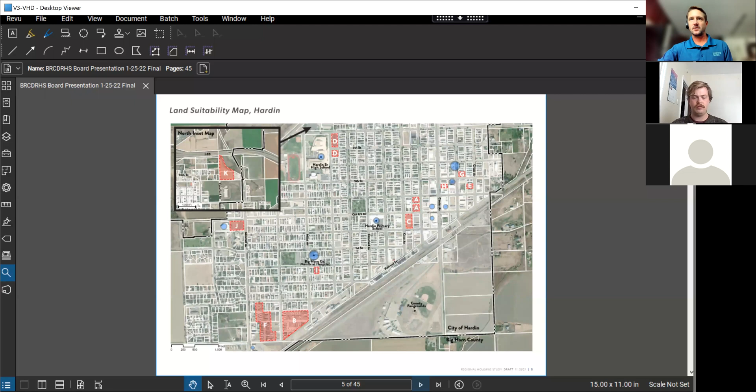So we've tried to explore all these options as we put these maps together. Typically we had between 8 and a dozen sites for each one of these.

So we looked at Crow Agency as well. There's a couple of projects that are kind of always in the works, but let's leverage the existing infrastructure where those projects are to maybe think about a different type of modular construction. There's already plenty of modulars out there. Let's use the local community development corporation. Let's look at some great case studies - the Good Earth Lodges are one that we'll point to here in a second.

And let's try to find a spectrum of sites so that the community can take these things, with the backing and due diligence done through somewhat of a scientific and land use study, showing that these are valid sites for further exploration. We'll show you how that might work in a second too.

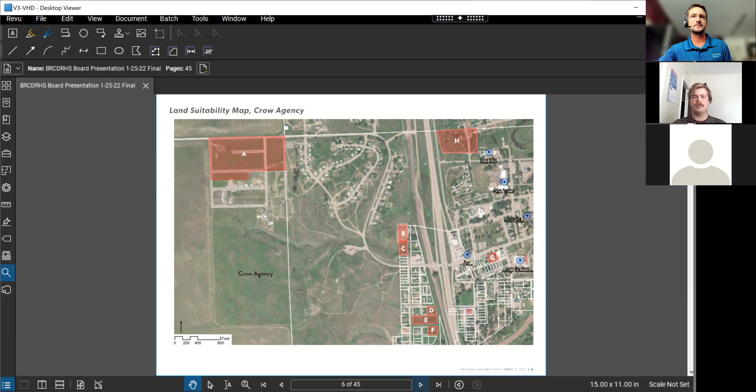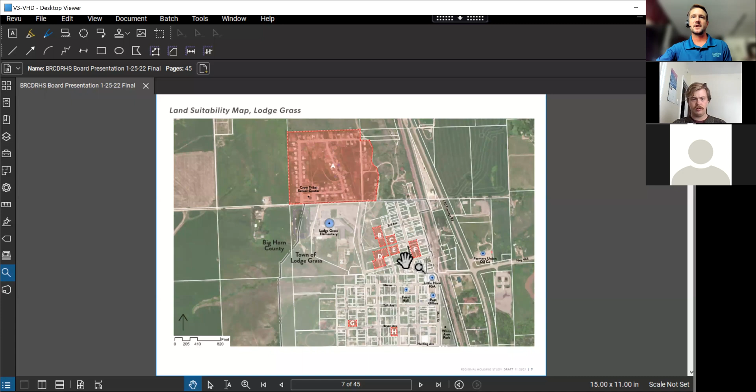We also looked at Lodge Grass and spoke with the mayor, other representatives, and the county commissioners there, and they've recognized a couple places where infrastructure might be extended. We want to make sure that if it is, there's not just one site - maybe there's a phasing to get this core area of former platted sites with new infrastructure to them. That could be a new cluster of homes that is walkable to some of the amenities in town there and close to the schools and everything else.

And it doesn't need to be new - it might need to be rehabilitation. Infrastructure is huge in this county and in the reservation - that's the biggest infrastructure need here. So when you're thinking about what's step one, let's make sure infrastructure is safe and healthy, and then the housing will be able to leverage some of those investments.

Rehabilitation I mentioned, and we'll show you some concepts about how there might be precedent for innovation using the Good Earth Lodges I mentioned - using compressed earth construction, traditional construction techniques. They leveraged available land and partnerships with institutions there. That particular project, which is linked in the study, shows how you can use local labor, local folks to provide jobs and to educate. Anytime you can do that, absolutely leverage it - it reduces costs and helps out everybody.

Carbon County, Carson, quickly go ahead, give us the upshot.

Yeah, Dave, I got a question. Could we zoom in a little bit? Yeah, you bet, let's see, I can adjust it for you as needed here. Maybe not that much. Okay, let me see if I can change this. That, I think that's good. Just a second here. I'll figure out a full screen here in a second.

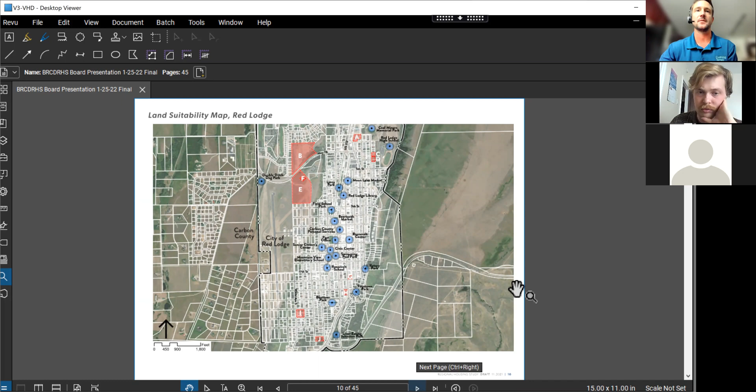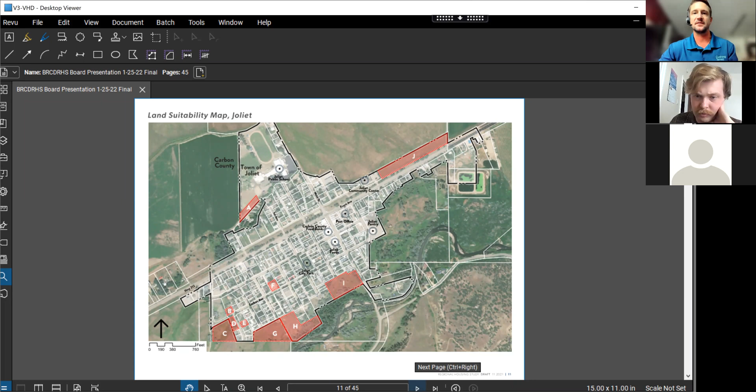Joliet, challenges are massive in Joliet, obviously, just because of a number of things - water, physical constraints, and then the highway going through town and crossing, and that's been kind of a safety issue there for a while. But if you start to look at the same parameters, there are a couple of sites that do appear to meet that opportunistic standard, but a lot of them are private in Joliet, so it's kind of a challenge too. There's a school district property up there that might be interesting, but a lot of private property, which has its own set of challenges. Infrastructure is always huge too in Joliet.

But quick Carbon County takeaways: let's look at those adaptive reuse options. Really great opportunities there to do something really cool that's meaningful for the community. The R4 zoning seems like a good district, so let's look at leveraging some of those zone districts to get one of those small to medium-sized multifamily projects. And that's not in the core area. The core area does encourage mixed use and historic scaled mixed use, but that R4 zoning seems like it might be the appropriate one, in Red Lodge at least.

Let's help employers build it themselves, as I mentioned, right-sized projects to fit character. And Carbon County, well, Red Lodge in particular has some challenges with conveying land for projects. They have to do it at market rate, but there are still ways we think you could do long-term leases or other kinds of models that would still help you with the fact that there's just not a lot of public or institutional land in that community.

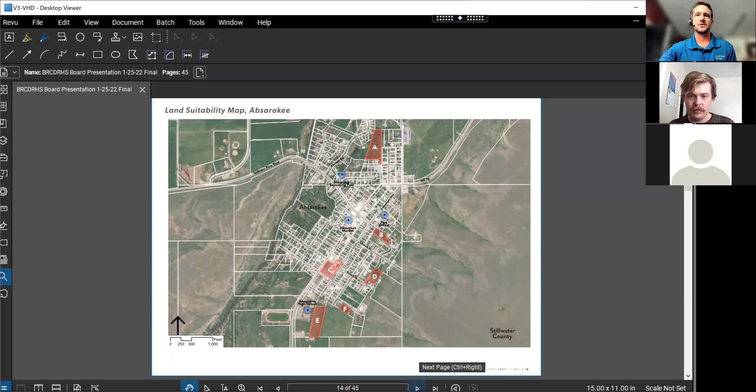There's some school district land out here, and we were interested in the old Sandstone School as a historic property, seeking opportunities to look at that in a way that could provide almost a new community center, which I know people are looking at as we speak. Wanted to make sure we had a good look at an interesting community like this that is unincorporated.

Lots of opportunity sites in Stillwater. Not a whole lot of diversity of housing types—there's just a couple multifamily units that we saw according to the tax assessor's rolls. These places really need a catalyst more than maybe some others, just because you need to really push the boundary on multifamily to have that kind of pioneer in the marketplace.

For some of the reasons Carson mentioned, a community land trust model, a permanent ownership model, might work there. You're surrounded by community land trusts, so that's an opportunity you might see. Then try to get that density up by getting smaller lots and smaller units in, so that people can still get that single family home ownership in Columbus, Stillwater. But if we can get the market side—the square footage—down, the cost down, then maybe there's a way to do that without as huge a subsidy gap or gap financing.

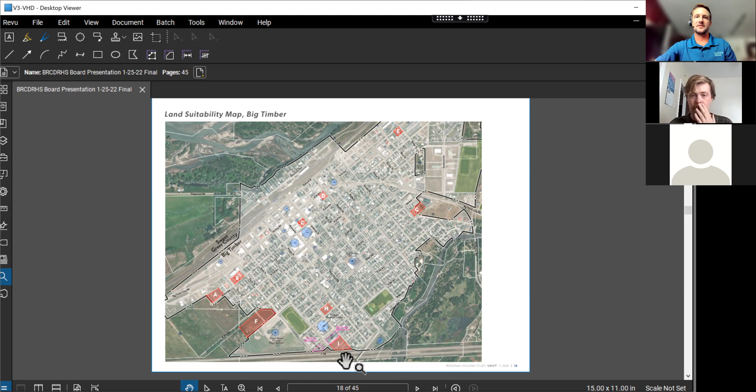Big Timber and Columbus have similar makeup. There's a bit of an outdated zoning code that might be preventing the ability to do that middle scale, smaller to middle scale multifamily project, so you might need to consider some zoning amendments, which we pointed out as opportunities. But there are some ideal sites along the old highway, and you can sort of have this critical mass already with apartments down here by the interstate too, with good visibility and good access, as mentioned, to both Bozeman and job centers and Billings.

This is just an example of another piece of information we include—snapshots of the sites. This is, I think, a good way to line up these sites with actual places, and there's some rehabilitation options perhaps, or just underutilized or vacant lands, parking lots.

Certainly in downtown Big Timber, taking parking lots away can be trouble for retailers. But again, to have that historic scale, perhaps mixed use multifamily building type—maybe not next year, but five years down the road, or maybe something in between.

Like I said, caught in the crosshairs. There's actually a lot of vacancy, interestingly, in Sweet Grass County for a number of reasons. It might even be more of that, I don't know, second home market growing out there. So we kind of need to look at some of those.

There's probably other infrastructure tools that you could utilize here. If the county, the city, the town wants to support in some way some of this new Zoom town type of thing, kind of like Red Lodge has as part of its economy, there's certain broadband or other types of technology they could leverage as far as infrastructure—not just water and sewer or roads.

So multifamily opportunities, that's pretty much it. One project in Big Timber might move the needle quite a bit. And then the interstate and highway corridors with that zone change might have a big effect on supply.

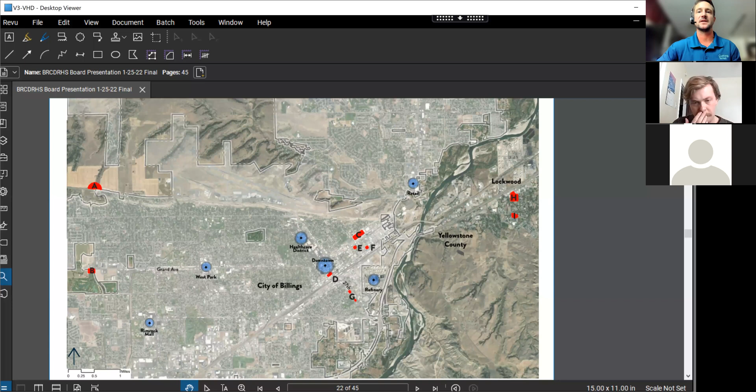And then of course the community development has their land banking program, so I wanted to identify those sites, test them against the numbers, and so on.

And then Laurel as well, with some of the new projects that are happening in Laurel, you're kind of getting a critical mass of multifamily right here, which is a great walkable location. Let's leverage some of that momentum.

There are a number of other projects that are happening up within the city limits, and they have big plans for the redevelopment of these areas. There's potentially some grant or TIF funding, I think, available.

And we know that some of these sites did have interest in them, as we spoke to stakeholders and others and staff. So again, let's make them meet the parameters, or see how they meet the parameters, and let's test them and see where we go from there.

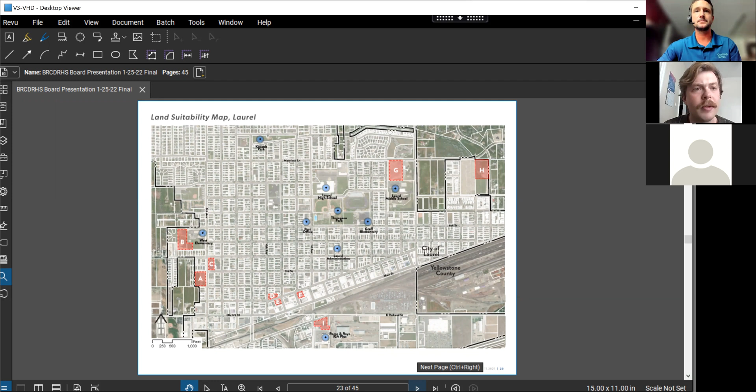Yellowstone takeaways, and there's a lot to Yellowstone because it is the biggest. So, but we had our 5 counties, so I had to kind of spread out our scope evenly. So, but just some of our quick takeaways from Yellowstone.

There is a good framework in place when you look at land use. So you just need that catalyst, or to be opportunistic to make some of those sites work, which means maybe finding unconventional sites.

And we know that the city is looking at all of its parks and recreation, city-owned parks, and maybe looking at a future planning consolidation or program that we could use those sites to either trade, bank, or otherwise use to finance housing. Even if it's on the site itself, there might be opportunities there. Usually parks are in good residential locations and so on.

So let's use TIF as a catalyst. Number 3, target those urban renewal areas. The project would catalyze growth. The growth would catalyze the project. So those are huge opportunities. As we know, there's challenges to them.

Smaller lots and unit sizes. When we were at the housing summit, that was the name of the game. How do we increase supply with smaller lots, smaller unit sizes? And there's a number of problems that are out there to doing that, which is why you're not seeing it a whole lot. But maybe putting together a program that helps when you get that pioneer in the market, might help things go a little faster.

Leverage that neighborhood mixed use zone. It's a new zone that the recode just established, or at least massaged into a new thing. And when we test that zoning, we find that could be a really opportunistic zone. Whether that's a rezoning, it's not everywhere in the city, but that seems to be a way for planning staff to at least try to set up a zoning framework that gets smaller units, more neighborhood scale mixed use. And then don't overlook the Laurels and the Lockwoods of the world out there, those emerging outlying areas, to perhaps take advantage of land economics that might be a little bit cheaper than other places.

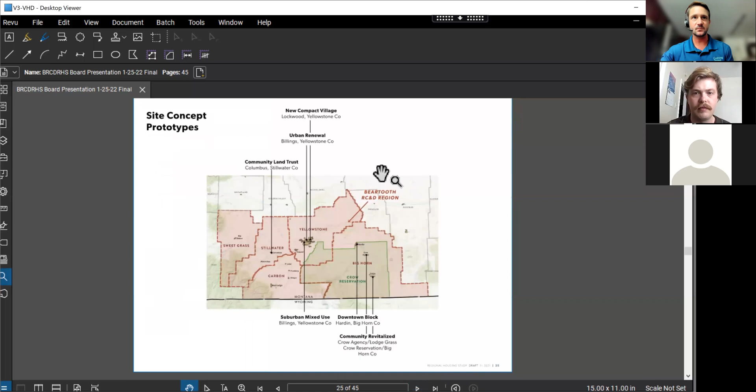Okay, we'll try to get through these site concept prototypes really quickly. So this is where we've taken... and of course, if there's any questions, please stop me. But we'll have plenty of time, I hope, here in a minute to talk about your questions and give everybody a chance.

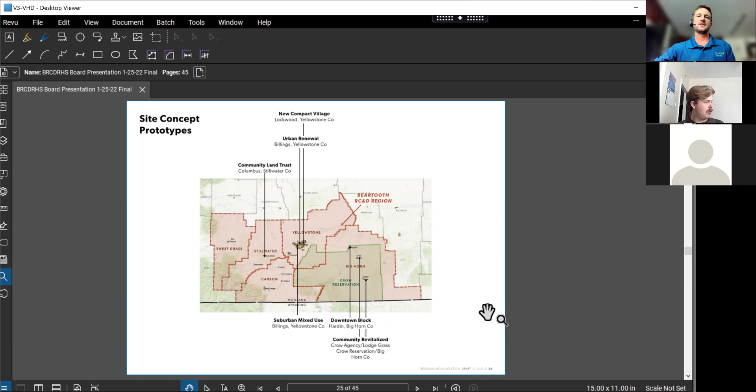So these were, I'll go through these quickly, but we had a scope to test out 6 sites.

It was 3 sites in kind of the Billings area, Yellowstone, and then 3 on the reservation. We wanted to pick these sites so that they all hit a certain condition, but were also replicable. So that's why we call them prototypes.

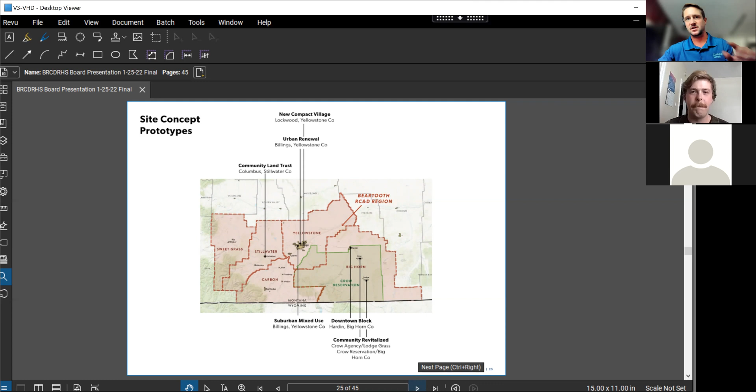We did find sites and looked at these things like a developer, and had our design team test them, but we wanted to make sure we picked ones that might be replicated, not just for one site. These aren't development plans, just concepts to see how these things work. We had a couple design principles, pretty standard stuff, but wanted to make sure we were promoting good sound site planning and land use planning, while still being realistic and compatible with local costs and conditions.

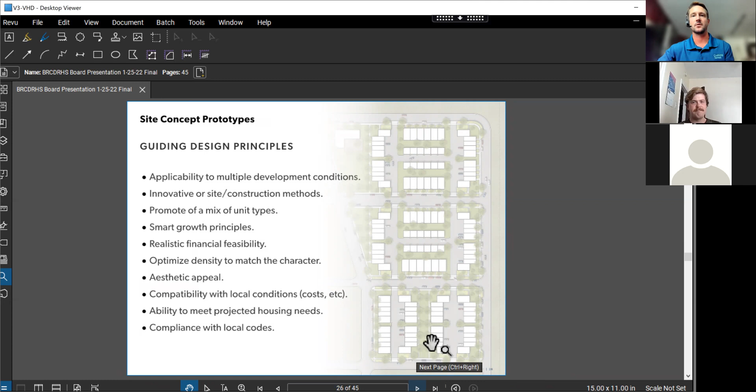So I'm just going to get into these things real quick. This is one we usually like to start with, modeled after a site in Billings, the Empire Steel site, former Empire Steel. If you've been on 6th, you've driven past it. It's a big old industrial building, a big steel metal building, and it's currently for sale.

We like this one for a number of reasons. One, we believe it's been cleaned up to residential standards, but if it wasn't, that's one of those brownfield funding opportunities to help with grant funding for a project like this. We also know people are interested in developing this site. Speaking with the broker, we've been working with a couple local realtors in Billings on this, because initially we had a concept that was about 250 units.

What we're hearing is that the density really needs to be pushed, which has its own set of challenges. It's kind of unprecedented. But what the development community wants to do is get to a unit count high enough and provide a ground floor opportunity for non-residential space, so that people in this new kind of community, which could be extended all across the whole corridor, might have a self-sustaining residential and non-residential mixed use.

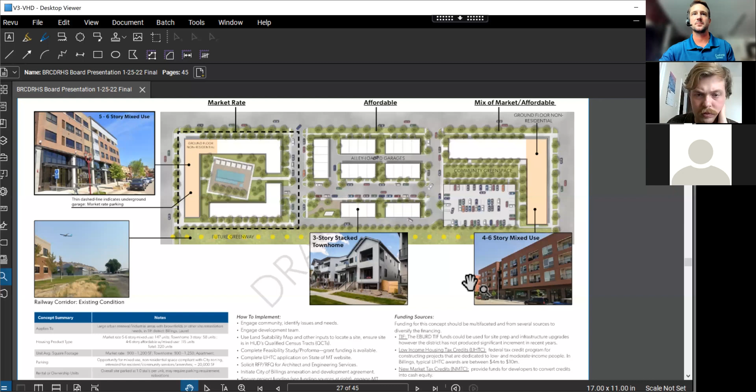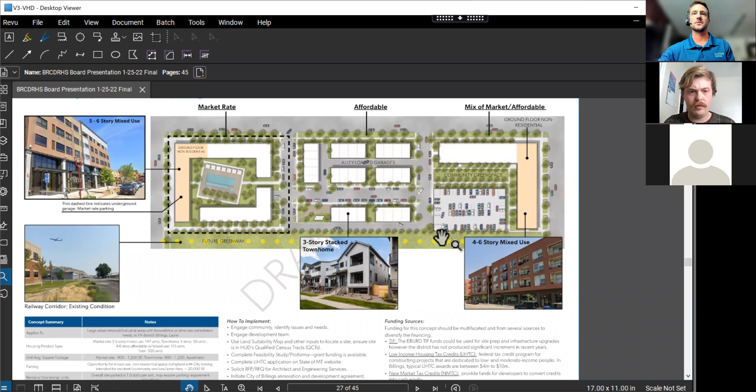At some point you have to do something like structured parking to make that work. Surface parking is always great for saving costs, but in this particular one, working through that back and forth discussion - totally conceptual - something like 320 units with about 18,000 to 20,000 square feet of non-residential space seems to be the sweet spot. If you do it with a market rate anchor, you might leverage that market income to promote a mix of market rate, affordable, and maybe even affordable ownership models here. It's difficult to mix different types and models, but we certainly see it in other parts of the state, even in Montana.

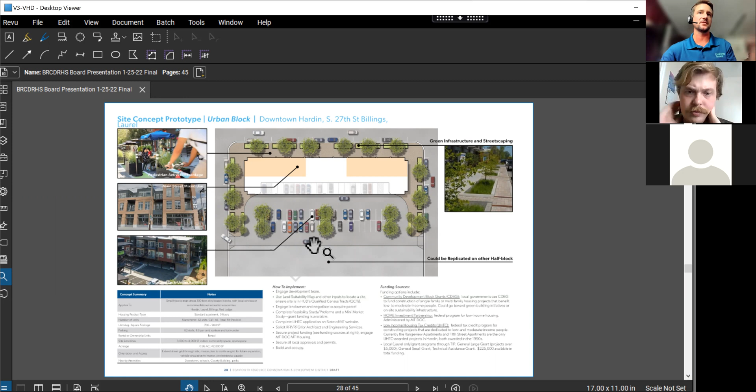This is another one we wanted to do. It's a 300 foot by 300 foot block on an old railroad town site, pretty typical, alley loaded. This one's from an example in Hardin. You also see it in Laurel, South 27th Street in Billings. So I wanted to test this one out.

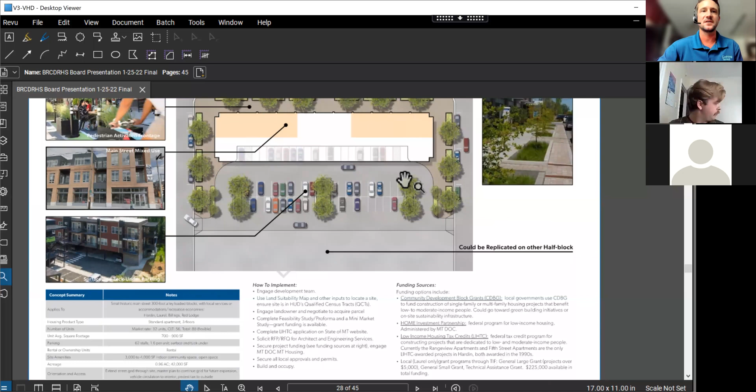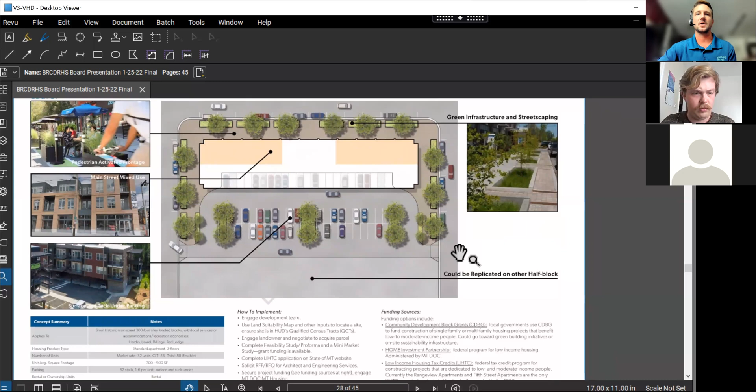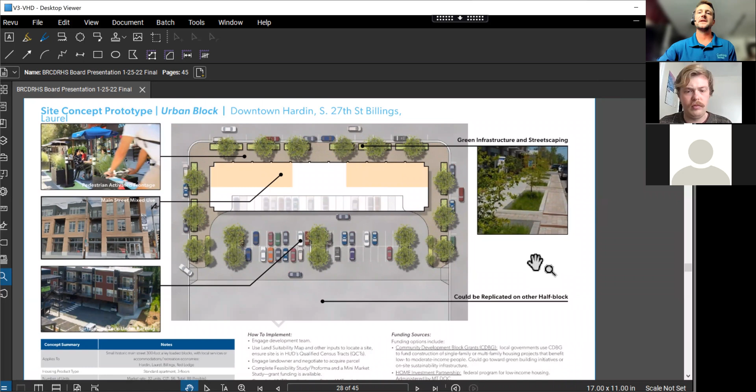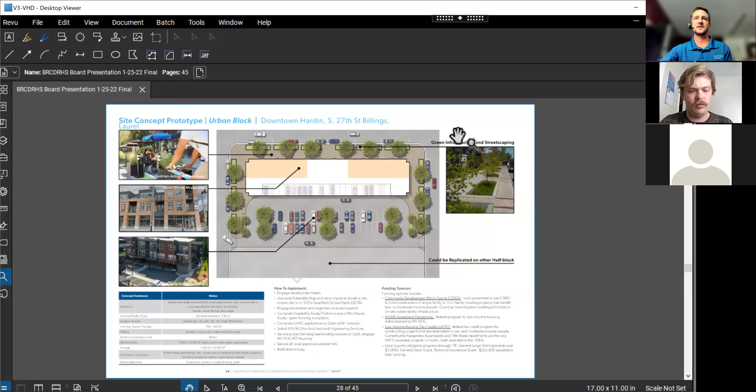If you happen to have a couple blocks, when I use opportunities to look at some of these, we get a lot of pushback - how is this ever going to work? It's really nice, but it's too expensive. But some of the programs and money available to do affordable housing projects, if you look elsewhere in the state, there are ways to get some of these really good design concepts into these places too from an infrastructure standpoint.

This is what we call suburban flats. This is one where you're on major commercial corridors.

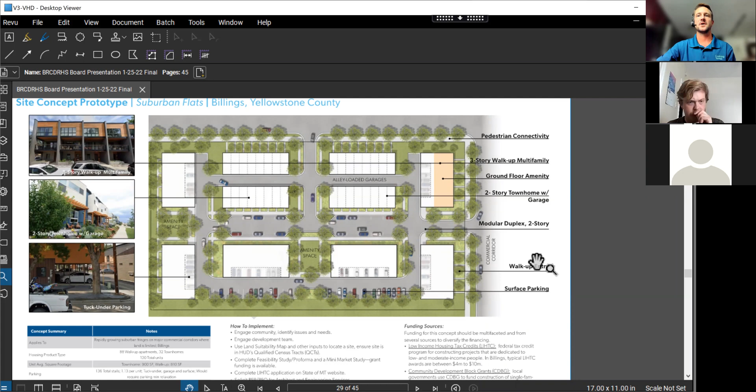This is probably more of a LIHTC, low income housing tax credit model when we're looking at some of these things, but we're trying to promote a mix of unit types here, a mix of unit sizes. So that's where you have the two-story townhome with alley loaded garages, surface parking with tuck under to save money. It's really difficult to do this underground. You do see it in some cases, but a lot of these multifamily ones only work if you get some kind of parking reduction or just bigger subsidies to save on that cost.

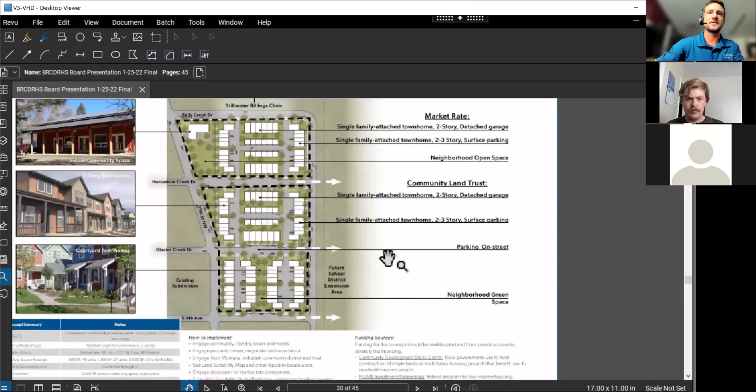I think we just have two more. This is one that we've worked with Trust Montana on a couple projects, and this is one that would try to apply that to, say, a site in Columbus in Stillwater County, using what we see there. This is trying to maximize that single family ownership that people love while getting that size down, so the cost is reduced as well, and being able to park it either with detached alley loaded garages or surface.

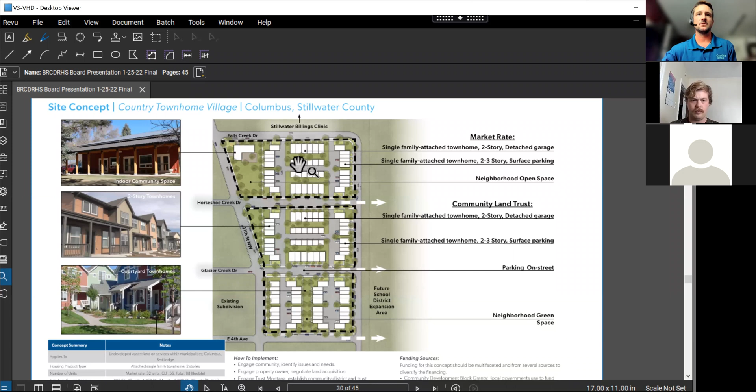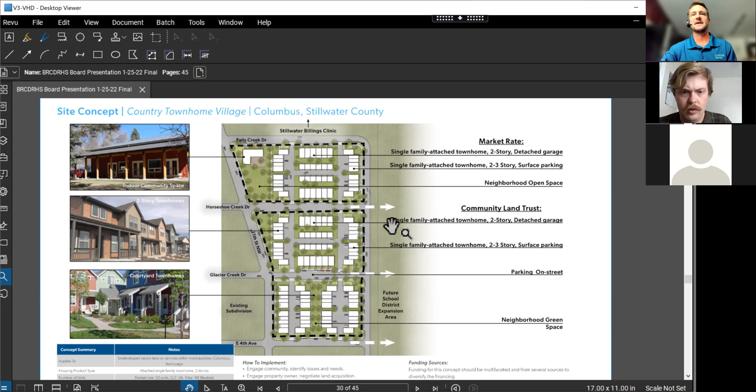Another huge design guide principle is to try to figure out how to do indoor community amenity space that serves the whole community as well as the development. This would be a market rate anchor, perhaps. We've seen this start to work in Missoula, where you have a 25-75 split of market to affordable, using that community land trust model, so that ownership is spread amongst the land trusts. And this is on school district land, so obviously working with the institution, the school.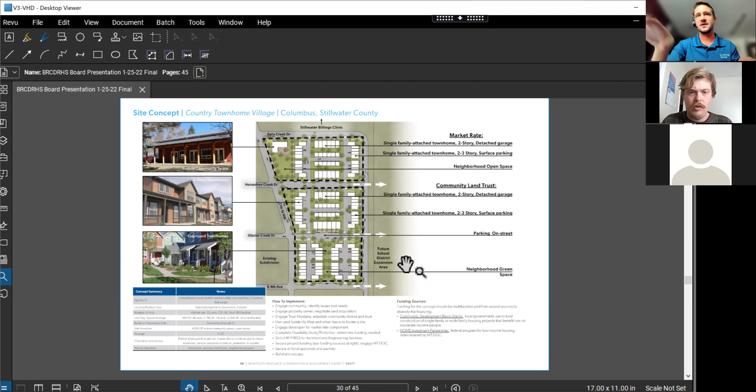Perhaps you give a dedicated percentage of those to teachers, as they even have opportunities to expand their school in the next 5 or 10 years, as this becomes a neighborhood unit and a new neighborhood, as Columbus grows.

Really quick, two more. This is one that we've seen the HRDC in Bozeman has done in Belgrade, that Belgrade smaller home model, that modular home, where they do have that on-site community amenity, or at least they partnered with Head Start to have that community anchor there. If you're familiar with that project, it's kind of these tiny cabins, but let's see how much we can get out of that model.

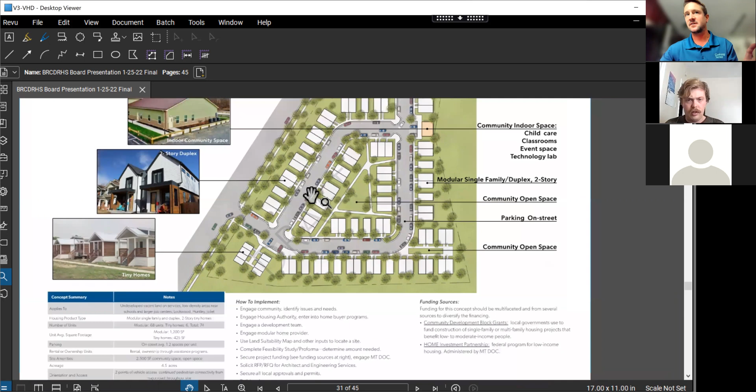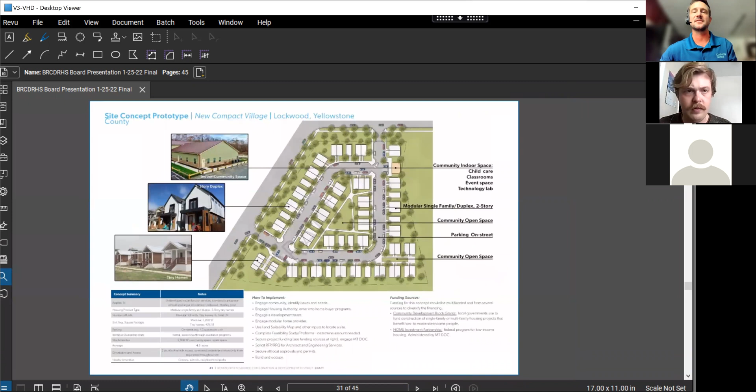So this is one with modular attached and detached, just a mix of those unit types with street parking. It's parked at about 1.5 stalls to 1 unit, and then a mix of different types there. We know that there's challenges with modular - some people say the lenders won't lend to them, but I think as time goes on, trying to push that level. I'd love to hear folks' thoughts on that.

And finally, for the reservation, we found this condition, as mentioned in our land suitability. We want to really think, how do we push the envelope with perhaps tribal housing, and working with the tribal entities to get local workers to help us with this, and use modular, but also push the boundary from an aesthetic, design, and cultural heritage standpoint.

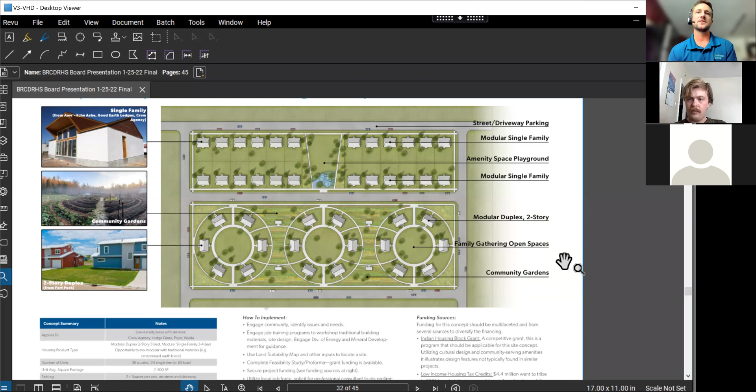So this is a site where we have these single family, what you typically see, these modular units, and we know that there's a lot of community or family group homes in this. So there's a couple of different ways to deal with the bedrooms, or just have enough bedrooms so families can be supported.

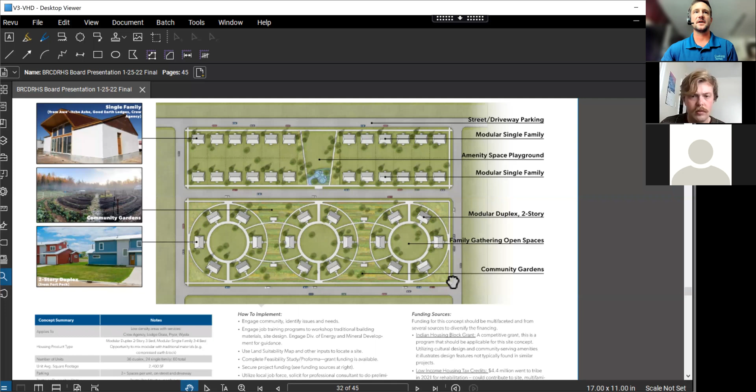These 2-story duplexes are pretty new, they're from Fort Peck. But really, one of the case studies that we liked is the Good Earth Lodges that I mentioned, which was a partnership between University of Colorado and the local housing entity there, and the tribes, where they use those compressed earth building materials. We looked at that case study and a couple other white papers that described what's going on in the world of housing, provided by HUD and others.

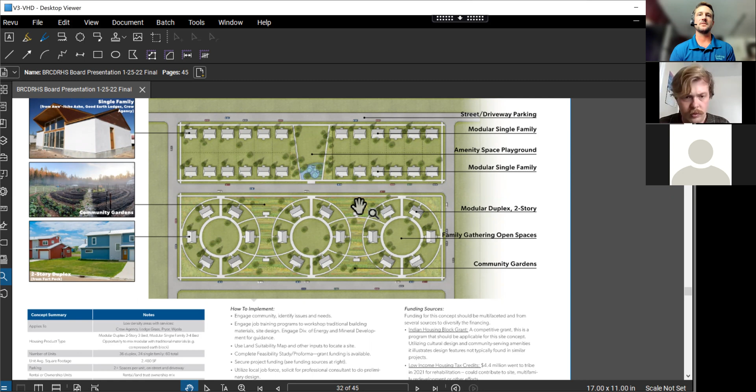We kind of like this idea, and we've been asking a lot of folks about this - these pods, these kind of community amenity pods, where it's shared central space. We know the importance of certain design motifs, so let's see if this is a replicable thing that you could take to different parts of tribally owned or trusted land, and apply it in a unique way that might offer opportunities for some community space, community gardens, or other kind of communal space in between.

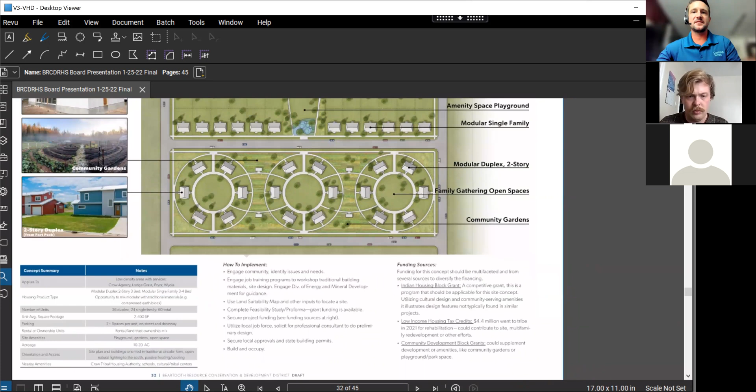So that is that. I know I wanted to talk about regional land trusts, or at least regional models, really quickly. This is what we've been really working on lately, is what does regional mean? What does regional entity and collaboration mean? It can mean a number of things. We called around and got some good case studies from a couple of different places in the West and East part of the country. The most effective model for producing and supplying units from a regional standpoint is the regional land trust model, and you do have some great trust resources in the state already.

But what would it take if the five counties got together and did something? Well, the first step is to get a list of people who might be interested, gather and talk about it, and maybe it's not a formalized nonprofit at first. Maybe it's more of a collaboration entity that has in its goals and strategic vision to become a land trust, but certainly getting together, talking about it, seeing what options are out there, and then doing outreach.

One of the big things about this regional land trust model, if you're familiar, is it usually uses a local nonprofit web, and we have that. That's one of the opportunities, and we'll talk about that in a second. But really having that network of local nonprofits and community organizations is key. It doesn't have to be a land trust, as we've seen across the country, but having a land trust does seem to be a little bit easier.

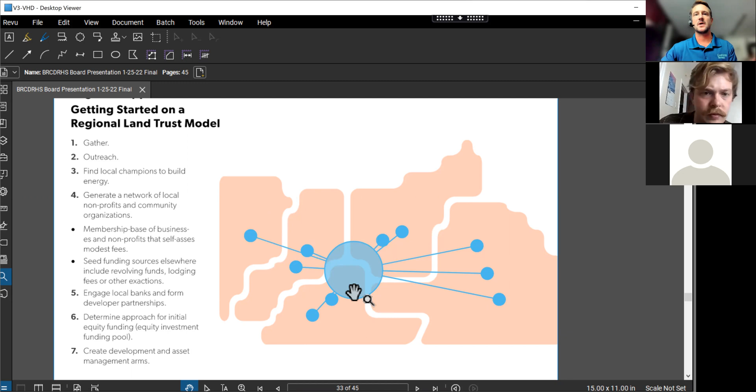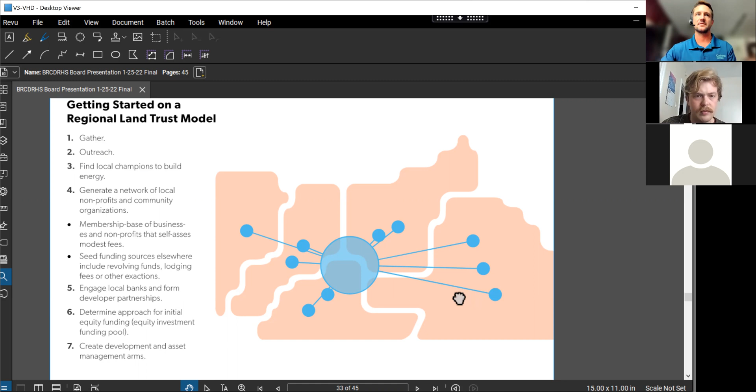You kind of have your regional land trust that works with smaller land trusts. That's certainly what we see in places like Vermont that have done a good job of this. And then you build up, you have to have some seed funding, so you can build up a membership base of partners, nonprofits, businesses that self-assess a small fee to get going. That's good for administration, hiring people to do these things, hiring consultants. Other places have really got their seed funding going using revolving funds, even within a 5-county, 10-county area. And then there's other ways to do it too, lodging fees, other exactions, which are difficult in the state of Montana, but there are other ways to do it.

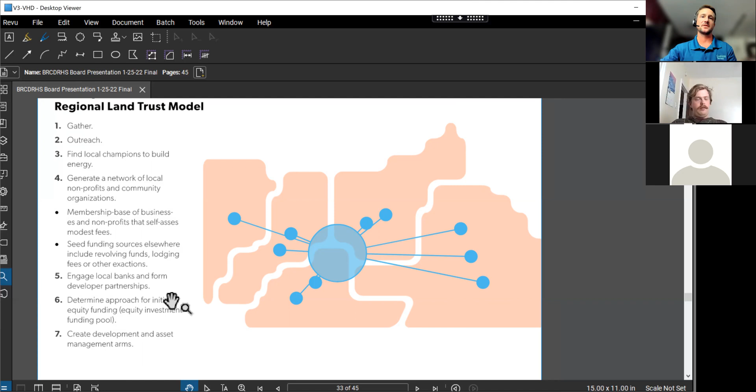Another huge part of how to is engaging the local lending community. It almost always has to happen that way, but there is one example of where you don't have to necessarily have that, but it certainly helps. And then determining where that equity is going to come from is huge - that's certainly a little bit further down the line. And then you have to, as a nonprofit developer, create your development arm and your asset management arm. It's a lot of work to manage affordable housing projects, as some of you may know. It's very persnickety, from managing all the tax reporting to your client, to your constituencies. It's really difficult, so having outside help or hiring a new position or a new person is huge.

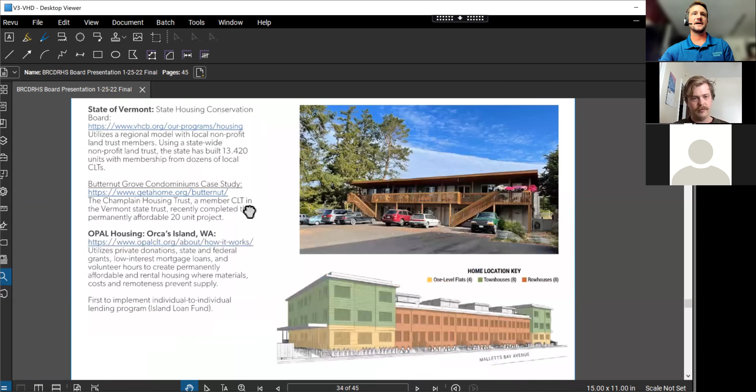Quickly, a couple of examples, case studies we were looking at: the state of Vermont, I mentioned. The State Housing Conservation Board was formed in the 80s - that's that kind of nonprofit of a nonprofit that oversees these local housing trusts. It's statewide. There's about 225,000 people in the Burlington, Vermont area, which is kind of in that scale that you're seeing in Montana. It's actually pretty close to the 5-county region that we're seeing here. So it's scalable, but there's a lot of heritage and history of doing that in Vermont.

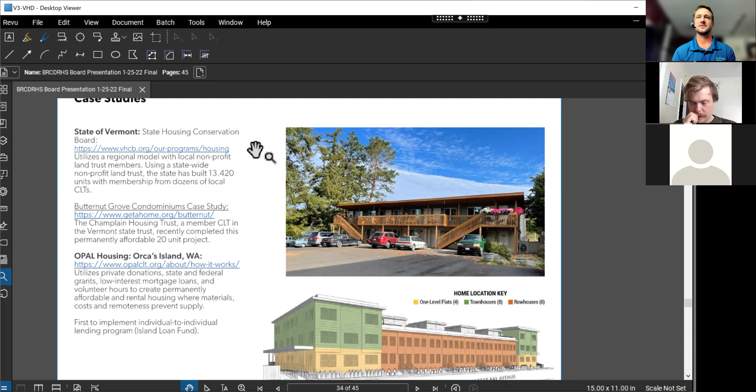So there's obviously challenges, but over those years, they've built 13,420 units, and they don't just do CLT, they do renter help, they do all kinds of good stuff - down payment assistance up to 25K, all kinds of really good programs that are in Montana too as well. But that's an interesting model because of the way that they've webbed the nonprofits and got everybody to kind of pitch in a little bit to get started, and now they're really getting the ball rolling on these things. I've got a couple case studies here.

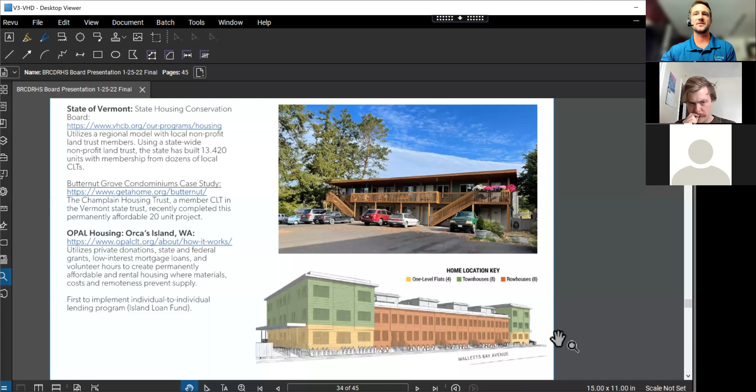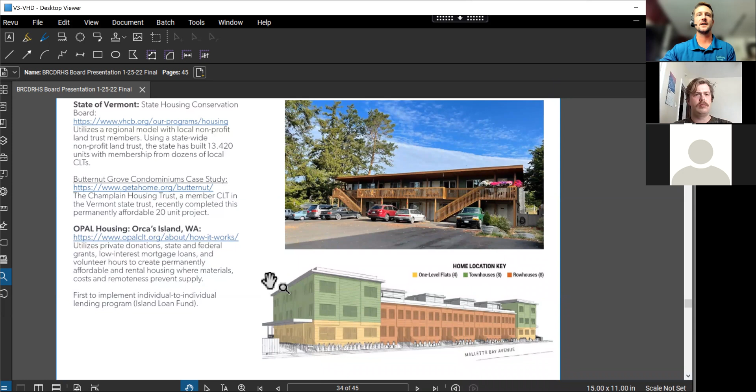This is the Butternut Grove condos, about 20 units, 18 three-bedrooms. They really went for that family scale, 3 and 2 bedrooms only. And they're permanently affordable, about $165,000 for a 3-bedroom, 3-bath there.

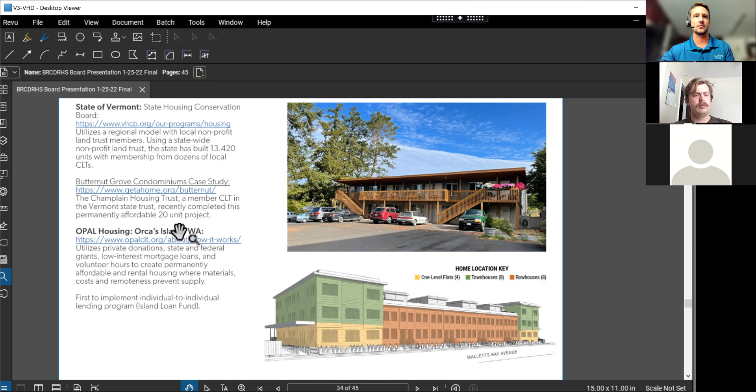And then Opal, which is of People and Land Trust Housing in Orcas Island, Washington. This is out west. The one thing I liked about this one is that they're on an island, very remote, not a huge population, but getting materials, supplies, labor is just as hard as it is in Montana. One of the interesting things is that they do individual to individual lending, so the nonprofit puts people with other individuals. It's kind of not necessarily a donation, but an interesting way that they link up folks. That was another way of doing it.

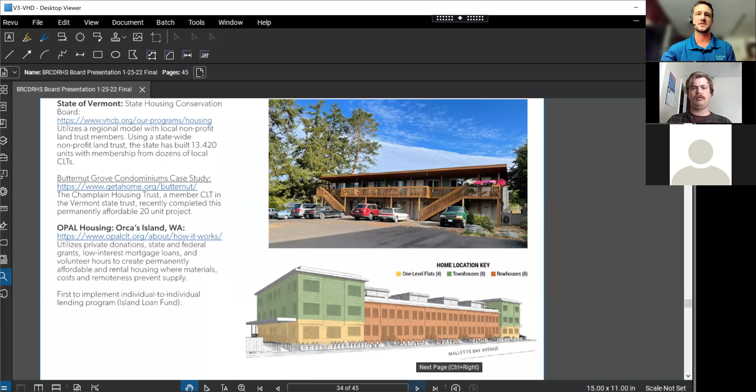Now, whether that would work in Montana, in Billings and Red Lodge and Sweetgrass, Stillwater County, who knows, but there might be applications there.

Opportunities and challenges we have for doing something like this in the 5-county region: we've got a lot of land available, publicly or institutionally owned, to get underneath projects. The local support and volunteer spirit is huge, that's an ingredient you have to have for each of these. You have the existing nonprofit networks and that demonstrated need. There are a lot of challenges too, mostly dealing with complex administration and the need for outside expertise to get these things going, and of course seed money, getting that equity pool underneath projects, which would be a lot easier with state level support, but there's a little work to do there.

So I just wanted to point out, it doesn't have to be immediately formalized, but there's a stepwise program here where you get representatives from each county, which we already have out there, start talking it through, make a strategic plan, and then get moving.

We've got a couple other resources we can provide to you. You can see the names of some of these places are a little different than Montana, but a lot of them are maybe what Montana is going to be like in the future. So I encourage you all to look at some of these resources we can provide after this.

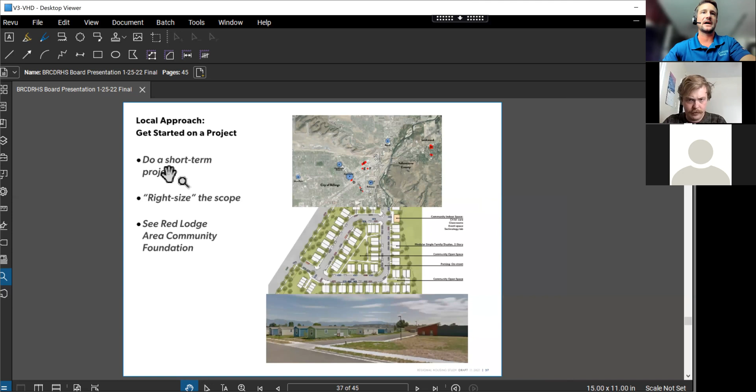And then the last piece is the local approach, and that's just to get started on a project. When we ask our outside experts in housing, this is a critical piece to getting started.

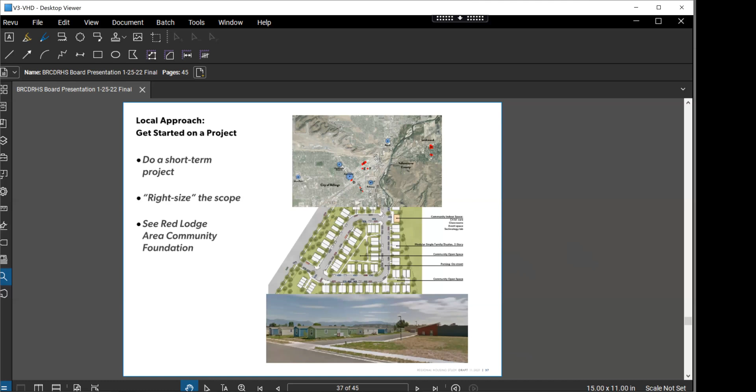Even something small, biting off a little bit, making sure it's the right size will really get your momentum going. As you look at the longer term, more regional approach, get that short term local approach going too, just like Red Lodge is doing there.

We have these implementation tables, which is more of a stepwise flow of action for the region and for each county. I'll let you look at those on your own. They have a number of different actions. Some are to take that Red Lodge Community Foundation approach and get a project rolling, some are more about having the toolkits available that Carson and his team provided. We've set those up for each county and tried to spread it out. It's not just BRCD doing everything here. It's definitely going to be a collaborative effort, no matter what happens, to get implementation going.

We also spoke to some state legislation, but just in the interest of time, the report does go through some of what you can do, what you can't do, and what you should do to get into your state legislator's ear, with Montana Housing Coalition and others that are already doing that good work out there.

Okay, so we just want to go right into questions. That's a lot of information. I just have a couple of bullet points here that we're thinking about, but we can answer any question. Can Carson and I get any questions you've jotted down over the course of this presentation? Let's go first.

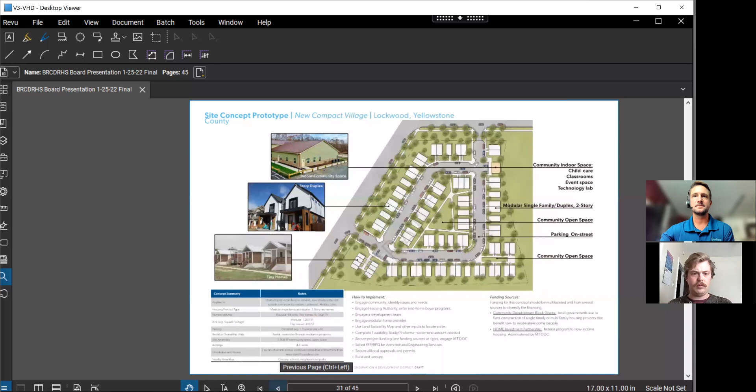So Dave, it seems to me there's some opportunities for economic development with bringing in additional businesses in some of your multi-use plexes, in the prototypes. Yeah, and so will we have the economic development councils all involved?

Absolutely, and to the extent we can, we've included them even in these discussions to see if that stuff works. I know they're doing this right now - some of the folks on the phone are doing this too. Don't let that good work go anywhere else than where it needs to go, and make sure these mesh points are made. A lot of this is just connecting dots, it seems like, particularly for Billings, Yellowstone County.

And for all the nonprofits in the region, everybody's doing the work, and it's difficult to get people to - you want to make sure people don't start working against each other or duplicating efforts. So that's the benefit of regional thinking, or at least getting everybody in the same room, discussing it at another summit at the regional level.

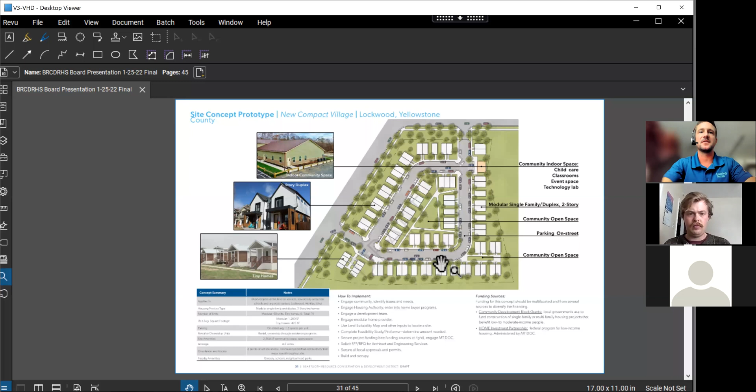But the economic development entities, with folks like Patty for this one example, it's being done out there. Get that at community space, and then the others with the multifamily, as you're talking about. What is that opportunity for this one?

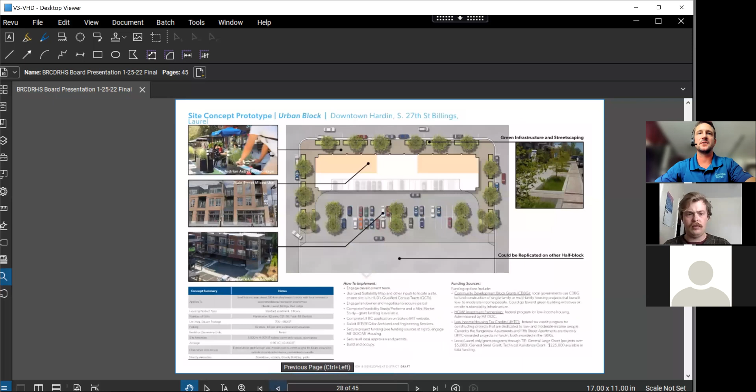I encourage you to speak to your development community - this is what they're kind of thinking. This one could be done subsidized, but there are people out there possibly thinking about financing this conventionally, doing it fully market rate, but trying to get that unit size down small enough so it actually is below market. That's what folks are trying to do out there, but there's difficulties in between.

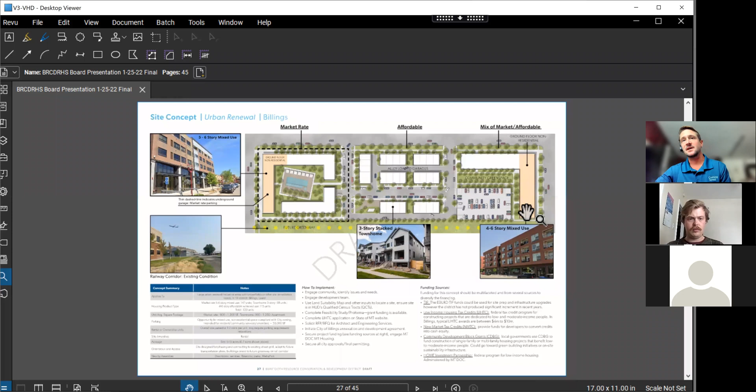That non-residential space - that's why it's referred to as non-residential and not necessarily retail - would have to take some help with the economic development community to find those tenants, and to find potentially funding sources to help them out, or help locals start their business there, whatever it may be - childcare, salon, something along those lines, a personal service, not necessarily small retail like eggs, cheese, ibuprofen - more towards personal services so you don't cannibalize your downtown businesses. I'd heavily encourage economic developer entities and folks to help out with that piece.

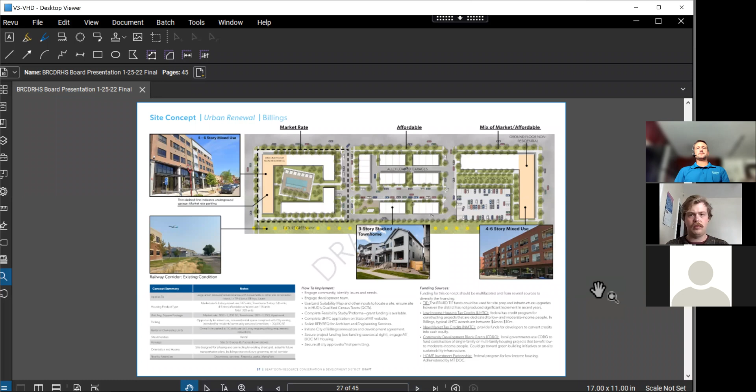I think we had a couple of questions in the chat box and some comments by Steve Arverskow, and I think that's the direction you're going with. Billings starting their own group and identifying the gaps there is a great idea. Then using the stakeholder group that Steve Simonson had put together, and Myrna and JC, to collaboratively keep going forward on this seems like a good approach. Steve Arverskow offering to assist us going forward is a great direction. I just wanted to make sure we were answering all those questions in the chat box.

Thank you. Of course, we're going to try and make this available to anybody and everybody who's willing to look at it, so we'll try to put this and the complete study on our website going forward, and make sure Big Sky EDA has copies, and anybody who wants to look at it has copies.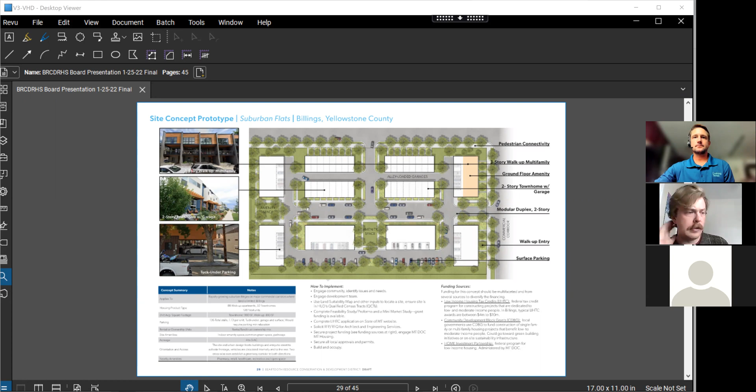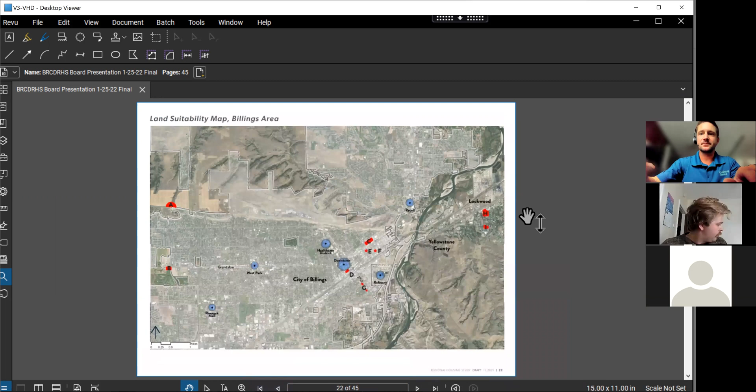I see there was a question on some of the information you were looking over on parcel D in Billings. I don't know if we can go back to that or not. Yeah, this is great. Is there a question about it, or sorry, let me see.

That's the Downtown Billings Association, partially owned I think, and I believe we have representatives from that group here. Speaking with them as part of our stakeholder interviews, that site's been on the radar for a long time, even going through the One Big Sky district thinking and conceptual thinking. You have that entity, the ownership there, the prime location. It's kind of like a half block that crosses an alley, in real life.

Part of it is that we wanted to make sure we examined the downtown Billings site, and that seemed like one of the ones that hit a lot of those parameters we were talking about: ownership, close to jobs, surface parking, so slightly underutilized, those kinds of things. I think it's in the downtown TIF district, isn't it? Maybe it's across the street. So that's kind of where that comes from.

Ultimately, we went with concepts for others for a number of reasons, just based on the analysis we did when we lined everything up. The other sites seemed to have more feasibility straight off the bat, based on the principles we're using. But if there's any comments on that, I'd love to hear them.

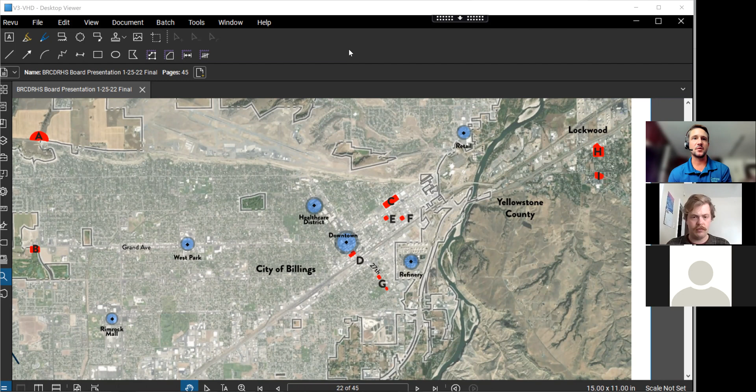The PDF will be obviously much easier to see than potentially a grainy computer screen, so apologize for any difficulties anybody had there, but we'll be able to get this out to you.

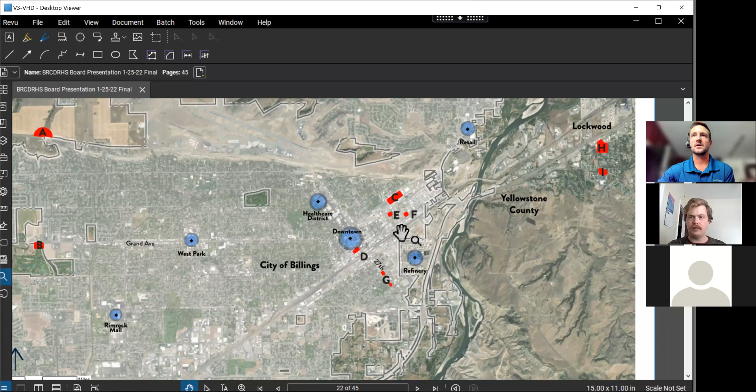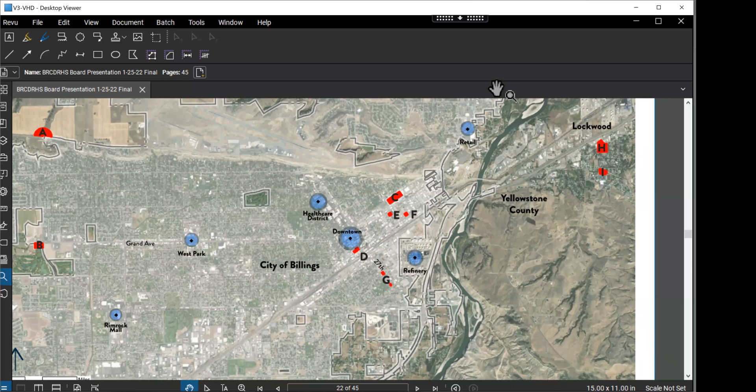Thank you so much, Dave. I appreciate your time, and you as well, Carson. This was really a great presentation. Yes, thank you for your work on that. Thanks everybody for showing up today, and everybody in the stakeholder group, and thanks to Dave and Carson, done a great job. Commend to BRCD for going through this effort and doing something that's kind of unconventional as far as a housing study goes. I want to make sure everybody knows that's a really great thing that you all did to go down this path.